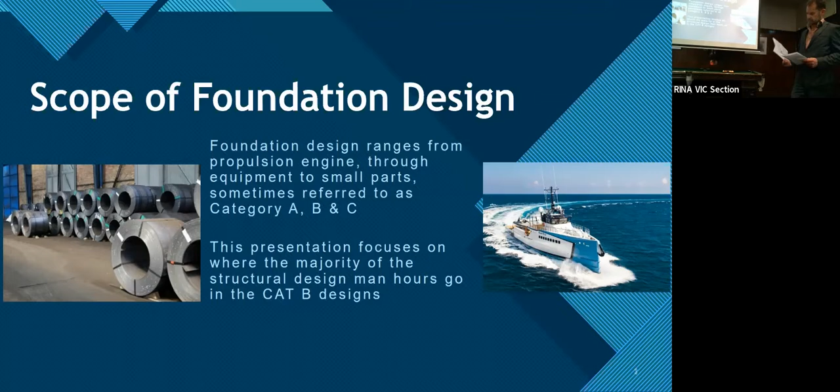Historical or traditional calculation methods is where you take a two-dimensional drawing and the engineer interprets the load path for different load cases which apply to the vessel. These load cases consist of the magnitude and direction of the forces which act on that equipment and structure. The structural calculations then assess the stresses, deflections, and stiffness to test whether they're suitable, and if not, the design is revised. If the design passes, then a refining process can take place. These are traditionally referred to as hand calculations, usually done with a MathCAD or Excel spreadsheet-based platform, or alternatively, a traditional FE process can be used.

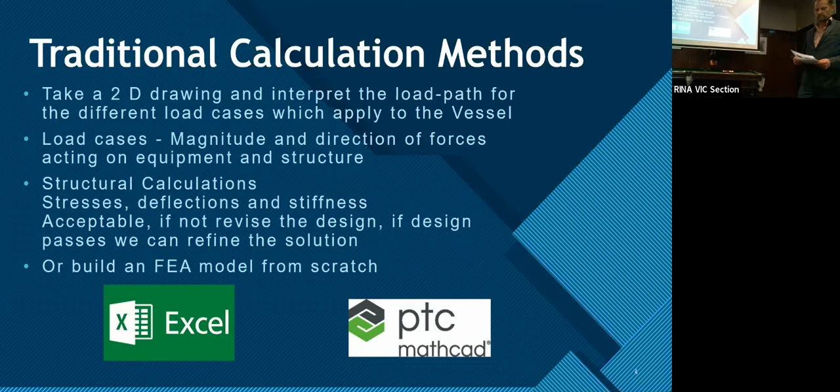So just a quick word on data. We treat all our customers' data in the strictest confidence, and the example you're going to see delivered later today is a dummy generic style example.

When we work up a design workflow, it's always customized to individual organizations, their products, priorities, tools, and people. This presentation is suitable to all sectors of the industry, from naval shipbuilding, oil and gas, commercial shipping, renewables, and mega yachts.

Seat design has formed a significant portion of my particularly early career, and the pictures at the bottom here show some of the projects I've been involved in and give a flavour of how foundation design sits within the design process.

Running left to right, the first is a Type 45 destroyer, where I worked on the FE for the CAT-A seats, including the main engine and gearbox seats, and through a range of typical seats, which would be pumps, transformers, racks, strainers, these sort of items of equipment, and then some interesting things like the breakwater up forward.

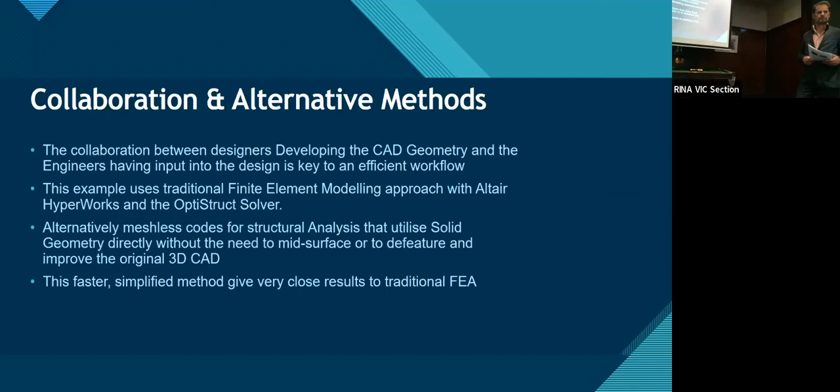Where projects are behind schedule, this directly correlates to saving time and catching up. Where projects are on time, it allows engineers to spend more time on refinement and optimization. Designers focus on doing the most detailed first pass of the CAD with this process, and engineers can investigate optimization of the design in different ways, and look at novel solutions.

The final point to note is, in an ideal world, you do the design, it gets built, and that's the end of the story. But shipbuilding is definitely not an ideal world. Rework varies from, the best I've probably seen would be about 20%, and I've seen well over 100% for long-running new build projects. Using the process we're about to show, reruns for models that have been created are much, much quicker, so your efficiencies compound over the length of the project.

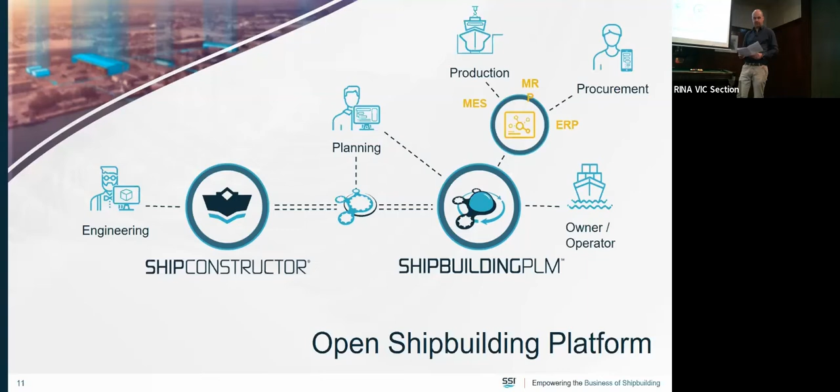Performing FEA throughout the ship design process is certainly not a new workflow. Models are often created specifically for each use case, with the level of detail suitable to perform the analysis. Aside from double handling work, there's a risk of user error.

NSRP, or National Shipbuilding Research Program, is a US government-funded program that works with shipyards and industry partners to overcome some of shipbuilding's unique challenges. One of the programs, LiftShip, was created to leverage existing FEA workflows at shipyards as the basis for automating large-scale lifting, turning, preparation, analysis, and reporting. Some of these include some of the US's largest naval shipbuilders: Huntington Ingalls, Fincantieri Marinette Marine, and VT Halter. The same workflows we'll see today are on a smaller scale foundation.

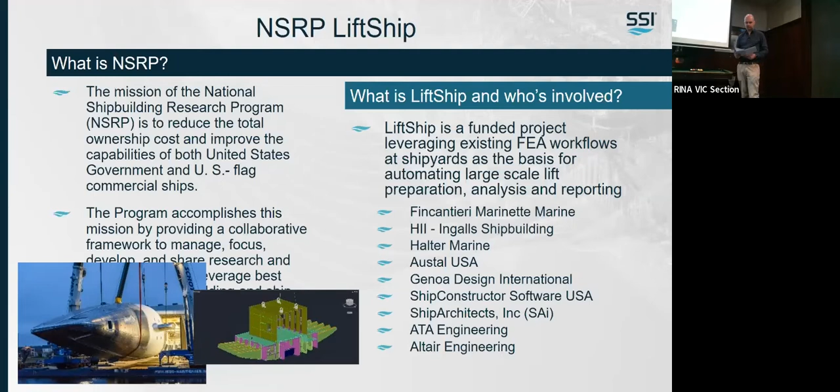So before we get to the good stuff - the validation and optimization shown in orange - I'll touch on the rest of the associated lifecycle. The software shown today includes Ship Constructor, Altair HyperWorks, and Shipbuilding PLM, although the process would be the same regardless of what software tools are being used.

Firstly, we need to find the relevant information. In the example today, calculations are required for all equipment items weighing over 200 kilos. In an ideal situation, within the common product model, a user-defined attribute would exist telling us which equipment items need a calculation and if a calculation has been performed. It's not always the case, but the PLM system or master equipment list can be searched and that information can be found.

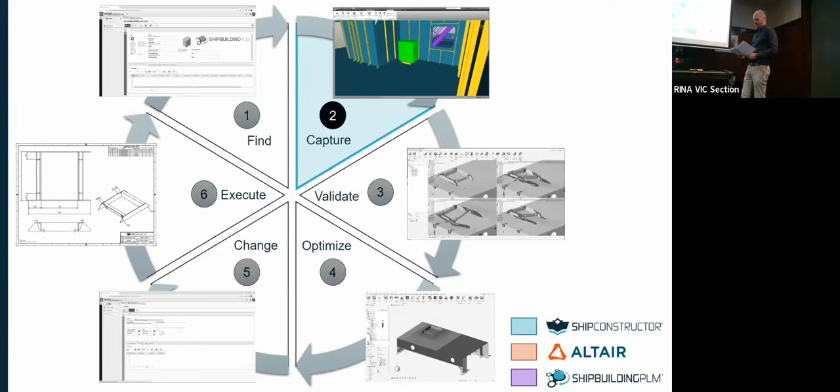Then we need to capture and reuse the information from the common product model. For a transformer, this includes the transformer itself, the nominal foundation that the designers put in, the surrounding structure, and associated metadata such as material, grade, and thickness. Then the foundation is analysed and optimised using specialist software.

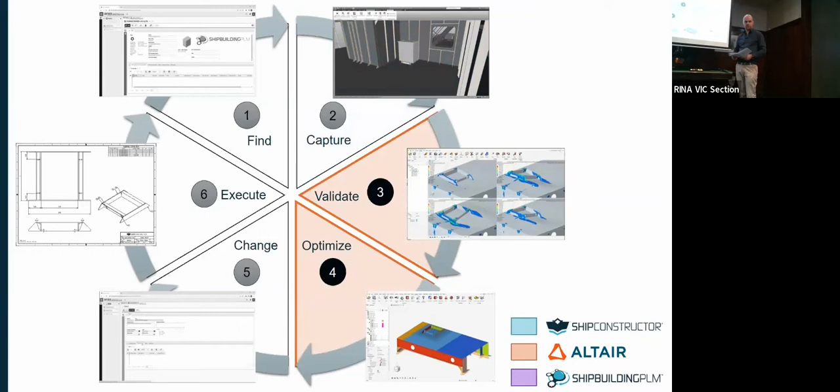Once the assessment's complete, the change needs to be made. Depending on the design maturity and internal processes, this usually results in the creation of an ECO, or engineering change order, where design changes are assigned and tracked. Finally, the changes need to be executed and tracked before being approved, rejected, or changes requested.

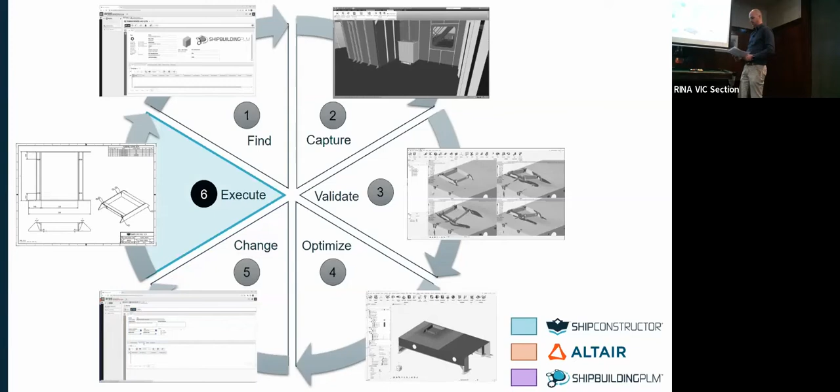Now we'll take a look at the process of finding information. Shown here in shipbuilding PLM, search for the equipment items in the model weighing 200 kilos.

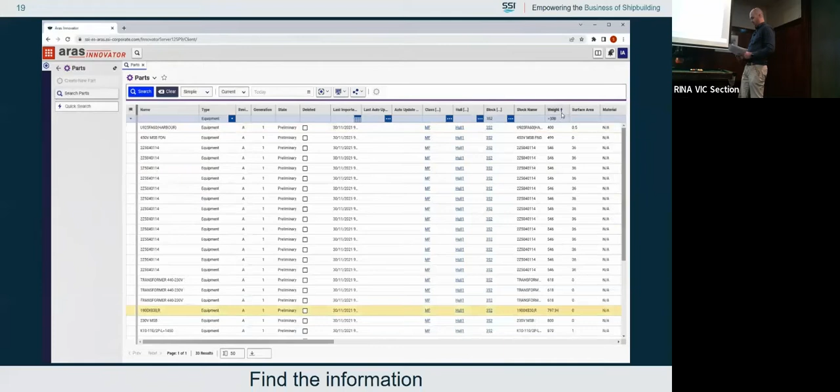Aside from the propulsion system and power generation, transformers are some of the heaviest items on the ship. Against the part, we can see properties such as weight, the compartment, and centre of gravity. We can view the associated parts and drawings, a 3D viewable of the equipment. We can view the requirements that led to fitting the transformer and view VFI documentation from the supplier.

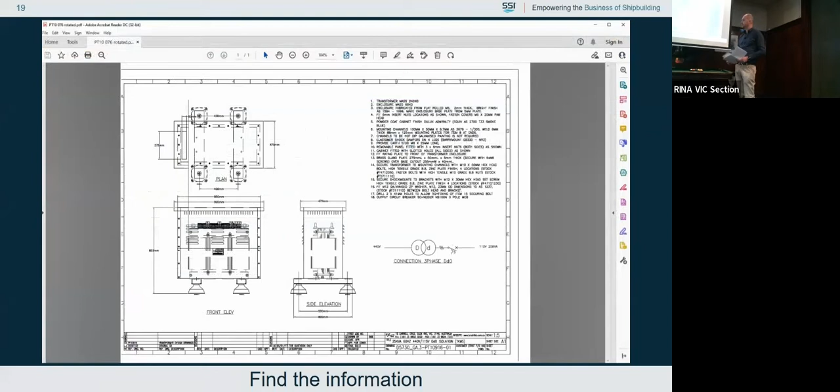Next up, capturing the information and reusing it. The sample vessel shown here is an 80-metre anchor handling tug. The transformer has been placed on a nominal foundation placed by the designer.

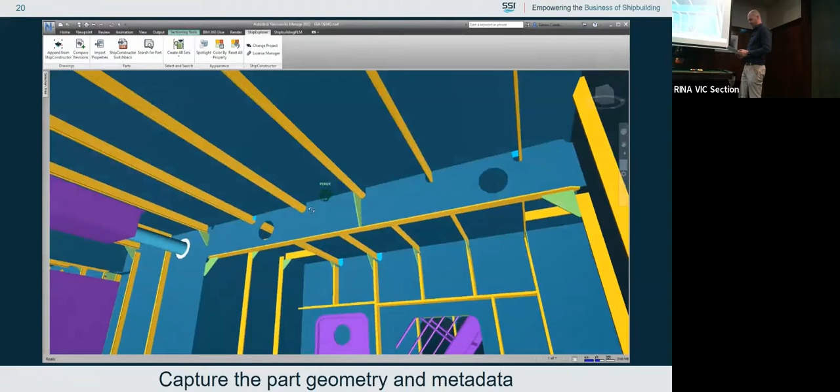This forms the basis of the analysis. The transformer foundation and surrounding structure need to be included. Filtering for the parts, assemblies, or structural sections,

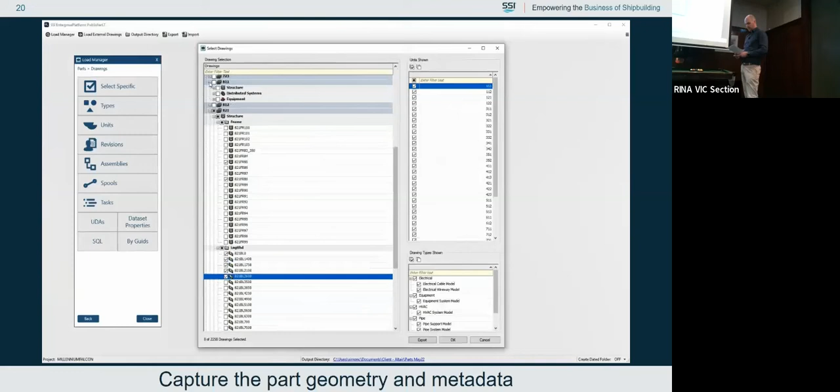we'll find that information and select an operation to create a step file of each part and an XML containing the associated metadata, material, grade, thickness. For this example, it takes less than 5 minutes from a desktop machine to generate the information required to do the analysis.

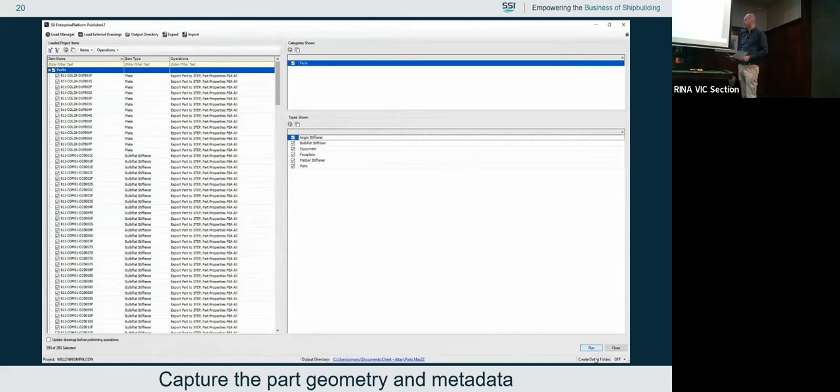From a technical point of view, a step file is created of each individual part and an XML list of all the parts containing the part properties extracted from the common product model. Parts can be selected one by one, or in this case, the easiest way to capture the information is to select the structural sections contained within the area of interest. The XML file contains material, grade, and thickness.

Following the design validation and optimization, back in shipbuilding PLM, an engineering change order is created. This depends on the maturity of the design and if there's a requirement to track the changes made to the model. When creating the change, all affected equipment is identified, and supporting documentation like the report from Altair, PDFs, and model geometry can be attached to this entry.

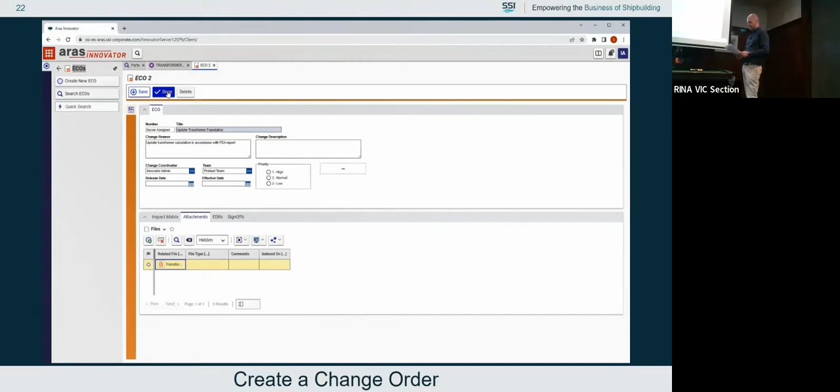Designers complete the work assigned to them under each task. Tasks track the model and drawing changes down to the part level. Finally, the changes will be approved, rejected, or rework requested.

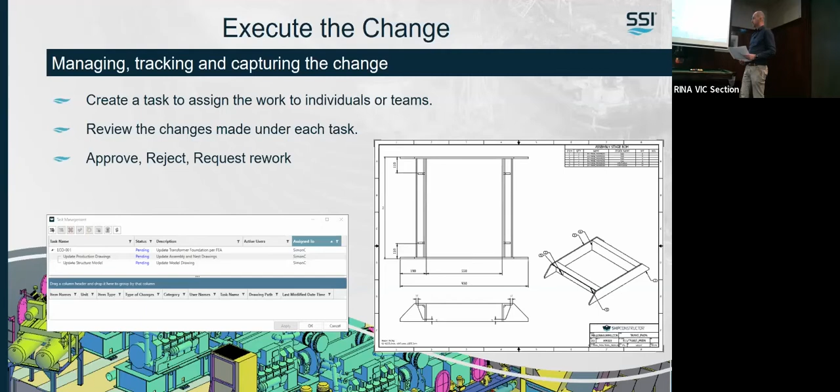Here's a technical look at that workflow we just saw. Engineering change order is created to execute the change. The design report and the relevant model geometry is attached to the ECO for designers to reference. Designers execute the changes, and all changes are managed and tracked under that ECO.

Those 15,000 customers include every single one of the world's major automotive and aerospace OEMs, as well as the majority of major shipbuilders and even shipyards around the world. Both commercial, high-performance yachts and defense. Our customers also include some that you may not expect, like Facebook and Qualcomm, and the financial sector with our artificial intelligence technologies.

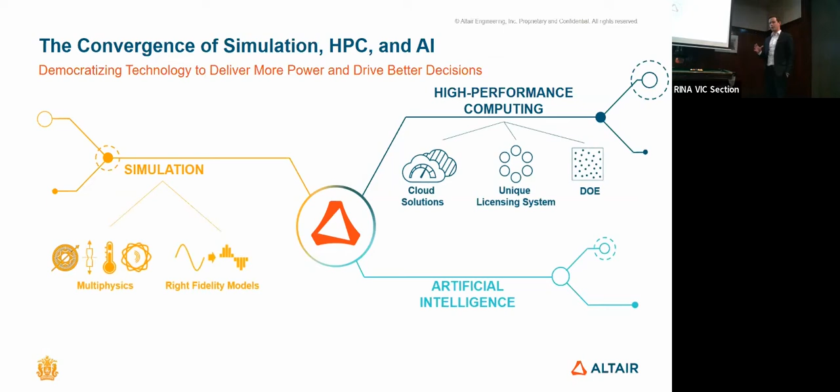Our main focus has traditionally been in simulation technology, where we're increasingly focusing on multi-physics and right fidelity applications, so that you can apply the right technology at the right time to capture the true behavior of your asset without compromising on what you're simulating and how. That's augmented by the availability of high performance computing, both on-premise and in the cloud, which allows you to do much more large-scale design exploration studies with DOEs and optimization and the like.

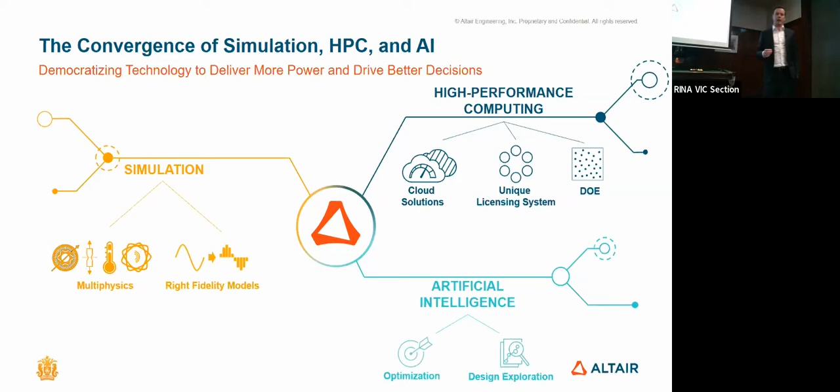And finally, in recent years, we've branched out and acquired an organization focused on artificial intelligence. All these new technologies allow us to provide more information earlier in the design cycle, so organizations can make better decisions with more information. This artificial intelligence augments that technology in design exploration and optimization.

One of the key factors is being able to automate this technology, make it seamlessly connect with third-party tools, so that you can very easily move through the design cycles, and you don't need to be an expert in every single aspect to get the outcomes that you need.

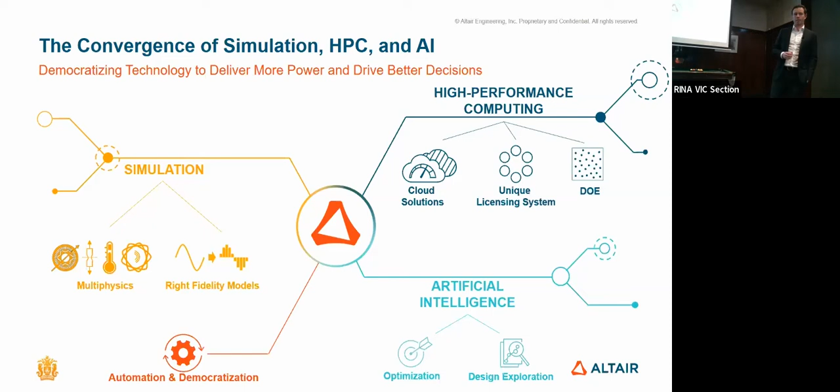Altair has been a leader in marine engineering for many years now, in a number of different areas, including racing in the America's Cup with SailGP and other organizations, looking at design and optimization of composite structures, topology optimization, and even fluid structure interaction problems for the hydrofoils, a real area of technology development.

Also looking at defense, as we mentioned before, Angus and myself have some overlapping experience on carriers and the like. This is an area of real interest for us because there are some really advanced technologies being put into this, such as acceleration shock loading, things that are really important like radiated noise for underwater noise, fatigue, and increasingly even in this space, weight optimization becoming important.

The other area we work with is the shipyards themselves, looking at lifting and turning operations, calculating cable tensions, structural stresses, and process optimization, because a failure in this environment can be very dangerous, but also extremely costly and time-consuming.

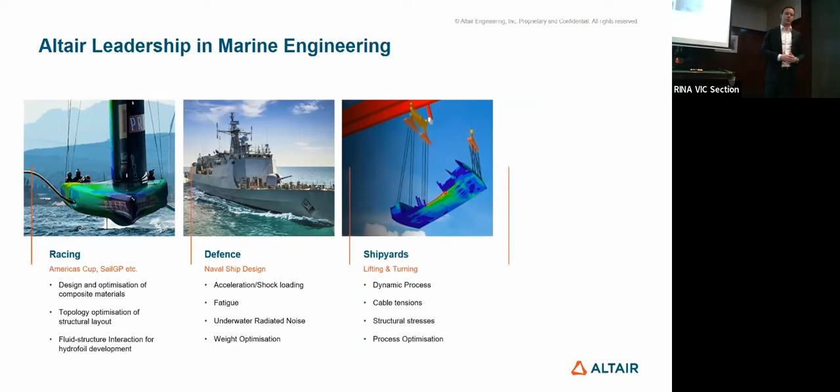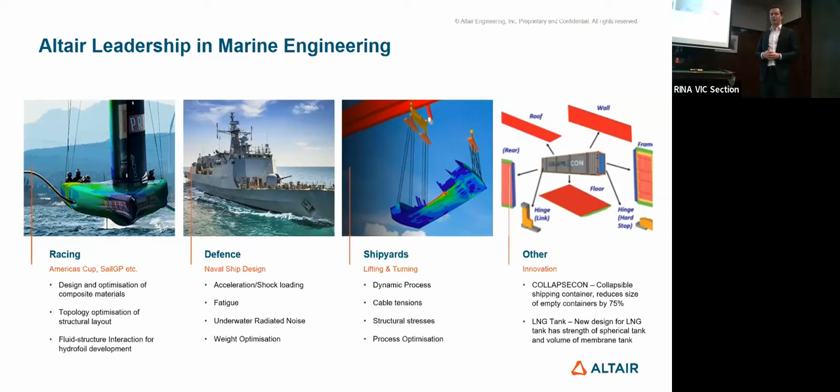There's a ton of auxiliary applications as well. Things you may not expect, like this collapsible container, which allows you to reduce the space taken by a single container by 75% when it's empty. We also developed a new LNG tank, which has been patented. It gives all the strength performance of a spherical tank with the volumetric performance of a membrane tank. So there's a lot of almost random aspects that go into marine engineering that you may not expect from us.

So just to touch on those three main areas of technology in a little more detail, starting with simulation. There's a number of areas of simulation technology available through the Altair platform where we work in marine engineering, starting with stress and noise, which is where we're going to be focusing today. So there's optimization.

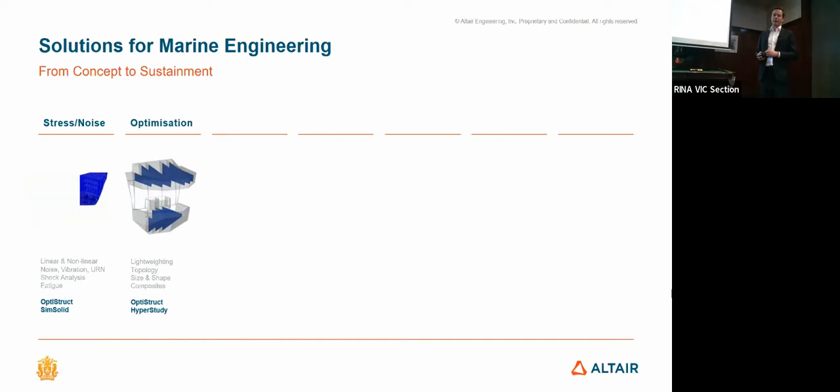In optimization, there's technology, like Angus mentioned, the flight control module. We're able to take the original packaging space, run a topology optimization to identify the load paths, and then perform an engineering interpretation of what that might look like, followed by a further optimization of that stiffening structure. In this case, we were able to save about 15-20% of the weight while improving the performance.

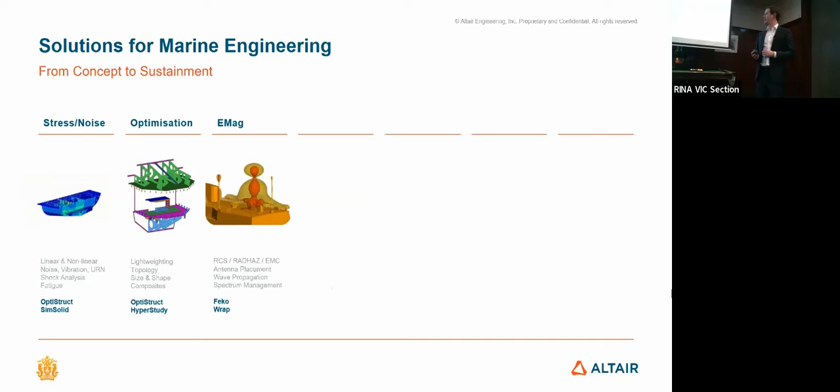The other areas include electromagnetics for radar cross-section, modeling radiation hazard, antenna placement, wave propagation, these sorts of applications when installing antennas on the ship. Also for fluid dynamics and thermal analysis, such as HVAC, hydrodynamics, and a couple of thermofluid structure interaction problems.

In the naval space, underwater explosions is a key criteria in the performance, obviously. So being able to do this quickly and efficiently is extremely important, and our new boundary element method allows you to do it in a fraction of the time of traditional approaches.

And again, more and more the issue of weight is coming up in this area. So being able to predict the performance of different manufacturing methods, such as additive manufacturing and composite materials, is becoming more and more important. And finally, the through-life support for vessels is essential and is actually extremely expensive.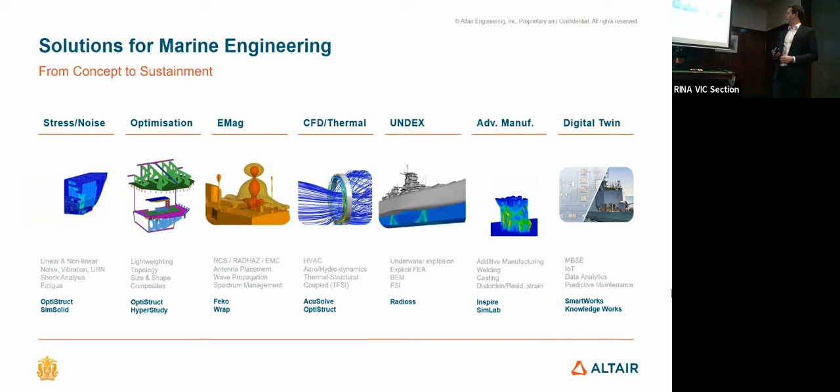So doing this efficiently and accurately by ensuring that you're not wasting time maintaining assets that haven't been loaded, but also making sure, more importantly, that assets don't fail in service is very important as well.

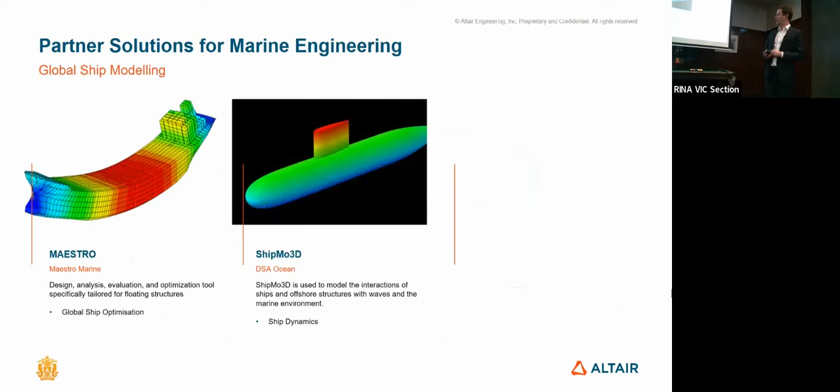So there's the Altair tools, also available under the licensing that we supply a number of third-party tools, including Maestro, which looks at optimization and global ship modeling, ShipMo3D, which looks at ship dynamics, and Proteus DS for systems that bolt onto the ships and apply loads such as towed arrays and these crane assets.

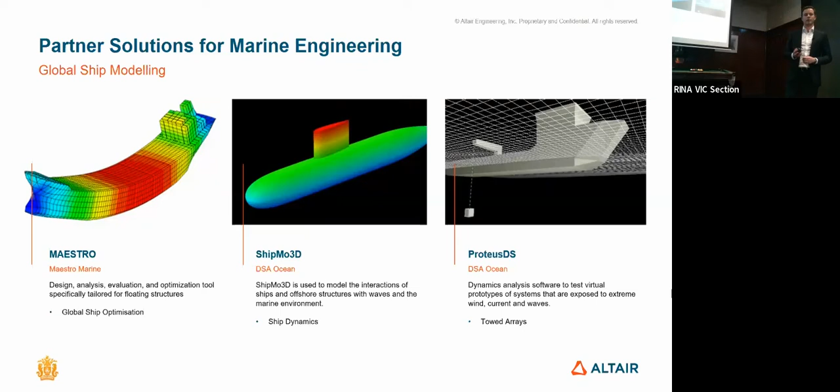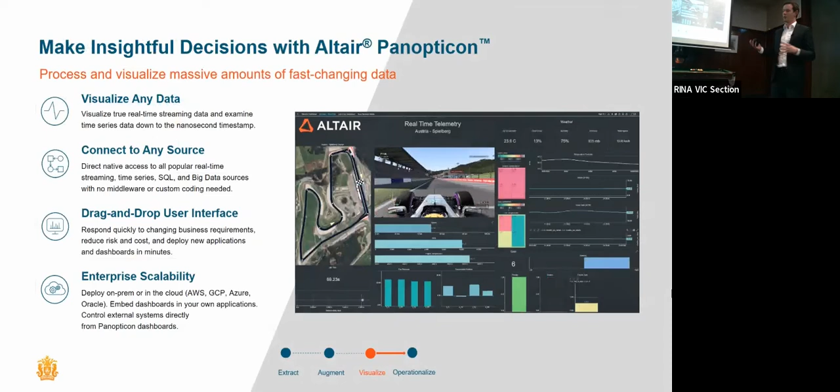So I will just touch on the other areas very quickly, such as data analytics and AI. We're showing an F1 example here, but this ability to monitor behavior and data in real time can be really useful, as well as being able to look back. So this is really useful for asset monitoring and management.

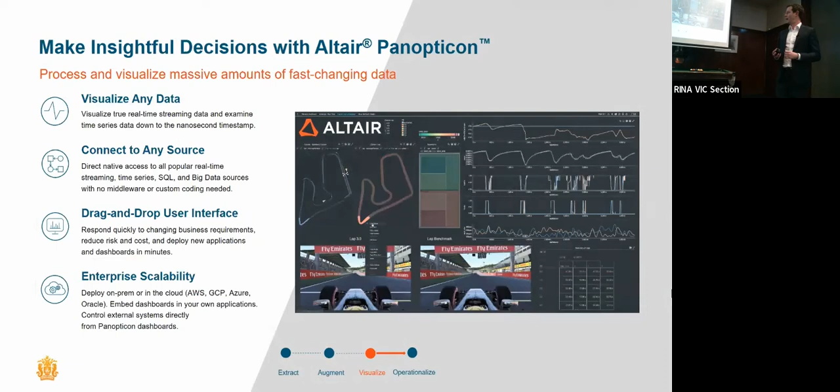And then in the high performance computing region, this really augments the technology and allows you to run much more than you would otherwise. So we have PBS Pro workflows, which primarily allow job scheduling so that you can run multiple jobs on a given system and be confident that they're going to complete in time.

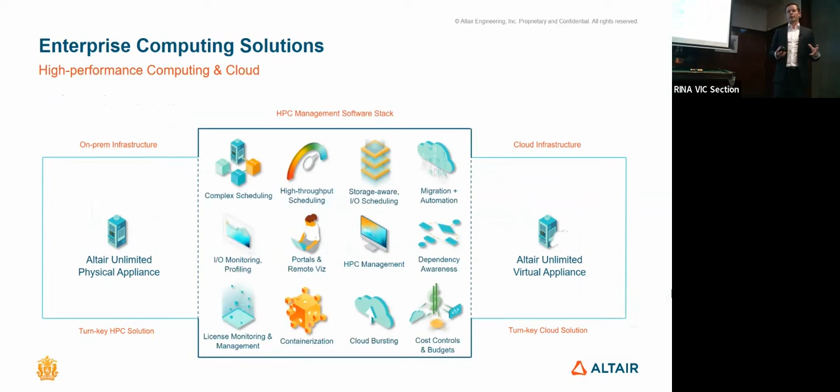But then a lot of organizations don't have high performance compute systems. So we actually supply physical appliances, a turnkey solution to design custom high performance compute systems, which we install on site. Or alternatively, if it's an ad hoc requirement, the cloud is a very good option. So all of our applications are available as a turnkey solution on the cloud as well.

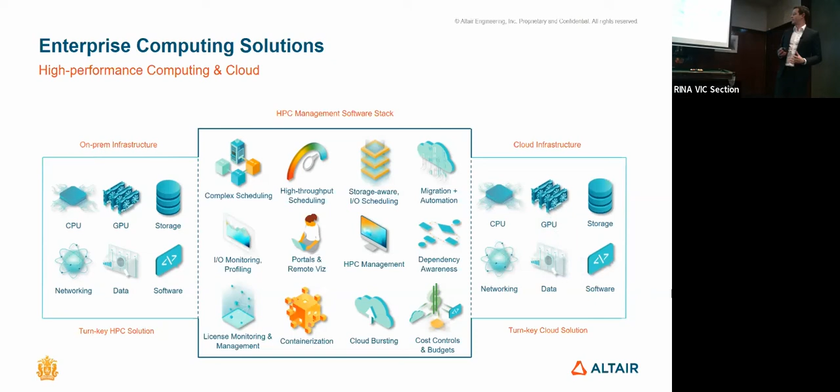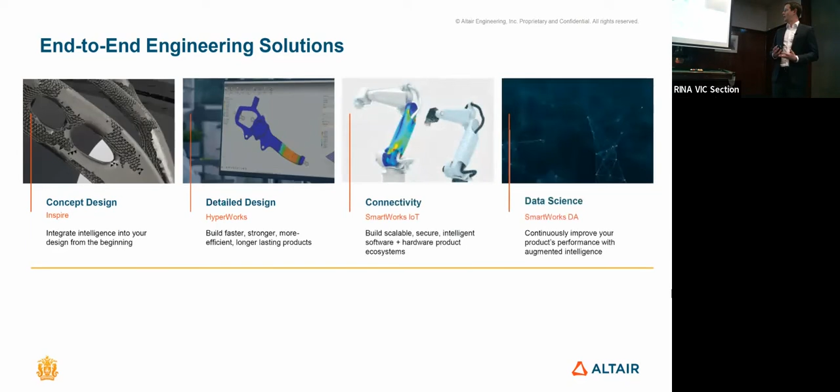So just to conclude my section, there really is an end-to-end solution from concept design, detailed design, connectivity and data science, underpinned by model-based systems engineering technologies, high-performance computing, and the cloud.

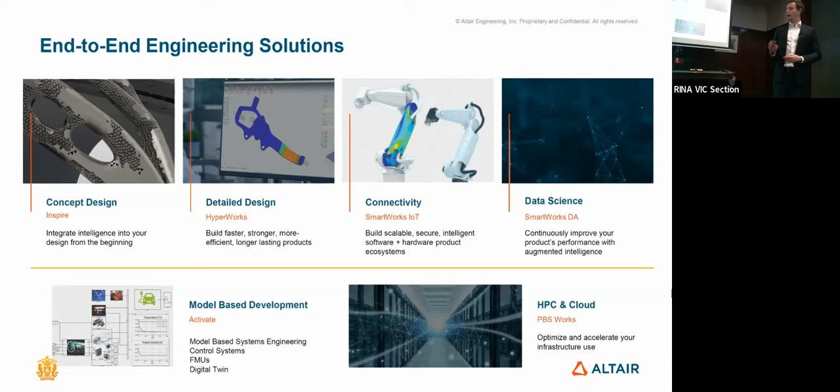So I will now pass over to Tim to work through the example on today's model.

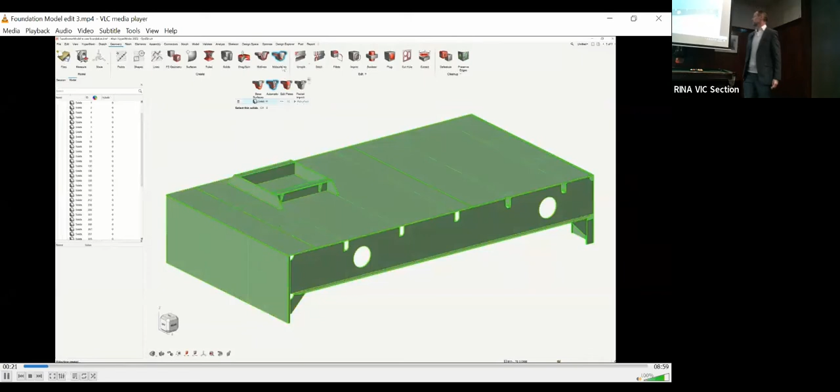So we're taking the solid geometry from Ship Constructor, from the CAD and PLM system, and trying to capture not just the geometric data, but the non-geometric data as well, that has the properties, the materials, the gauges, and so on into the model.

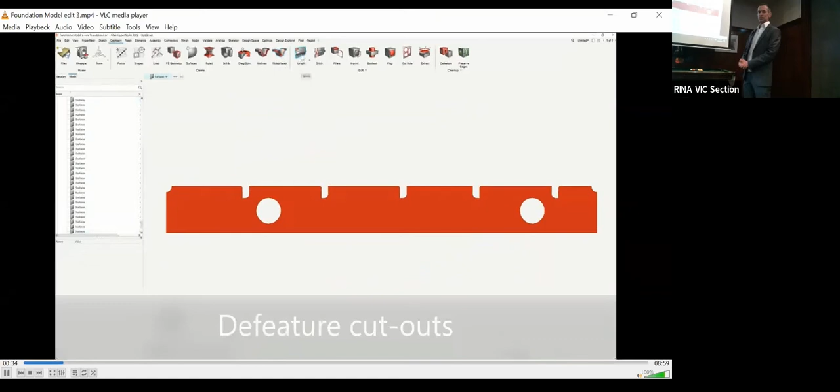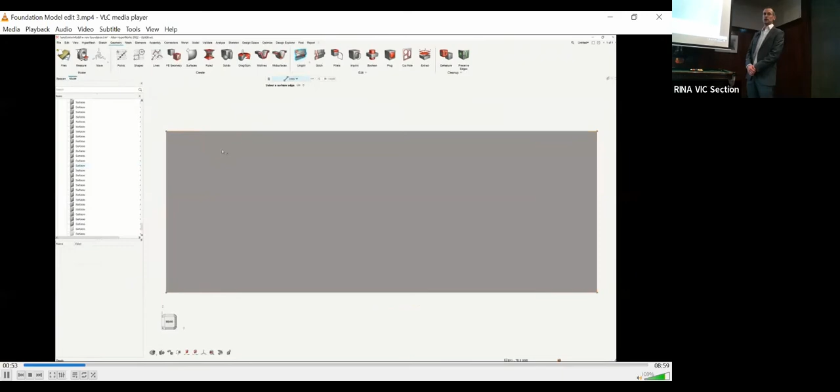Then we're creating a mid-surface representation of that. We're removing some of the features which are not necessary. So we're focusing on the detail of the foundation on this part, and the surrounding structure we can represent as a more simplified part. So we remove the features we don't need, maintain the ones we need to keep, and get an accurate solution.

So here we're just removing some of the cutouts on this model. And then we're going to focus on the design of the foundation here, which supports the transformer on the vessel. So you can see the mid-surface has been created, but the surface is not yet stitched together.

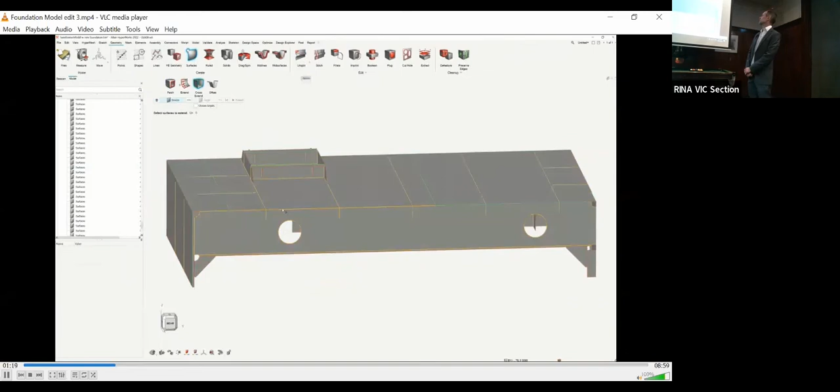So we just need to reconnect those mid-plane representations of the geometry, so we can produce a shell mesh of the model. This gives us a much more efficient FE model of the structure by using a shell mesh rather than a fully solid model of the structure.

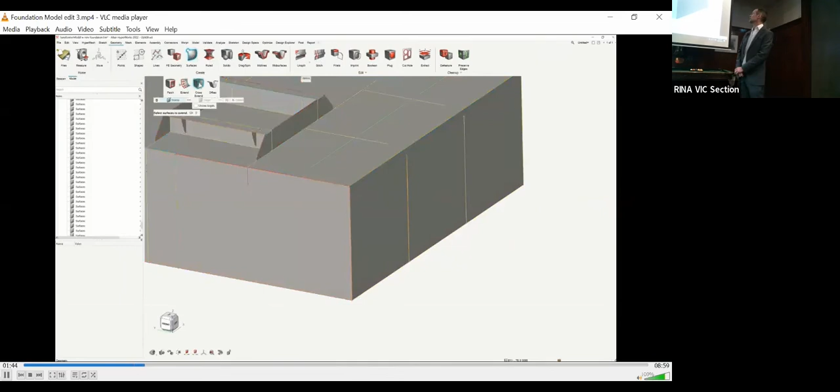So we can modify the geometry. Ideally, the CAD and the designers have given you the model and the details you need, but you can also modify it in HyperWorks, as seen here, if you need to. So if you need to add features that are missing, or change the design and see how that affects the results when you validate or optimize the parts.

So here I'm just showing you can quickly copy and paste some of the ribs from the features of the model, move those to a new position, and stitch them back in. So if you need to add features and modify the design, you can do that fairly easily in the new version of the software with the modern interface we have now.

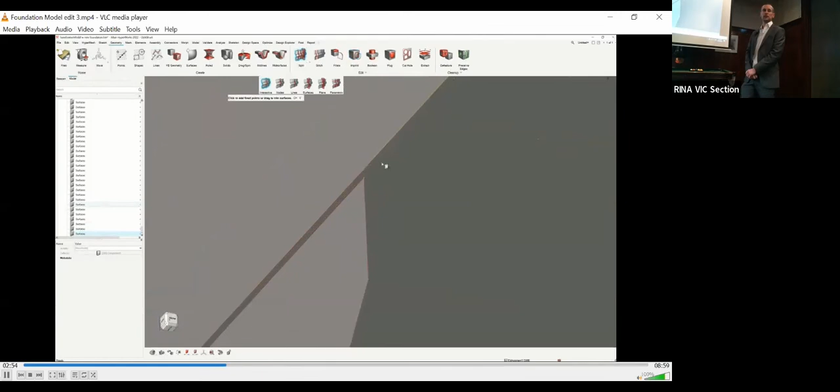So the roof's been copied and offset, and then it just needs to be stitched back into the main structure here. So we're just imprinting the new surfaces we've duplicated to support the structure, imprinting and connecting into the rest of the surfaces. If the design has all been completed in the CAD, you obviously don't need to do this step, but these are extra steps you can do if you need to go further and make modifications for the simulations.

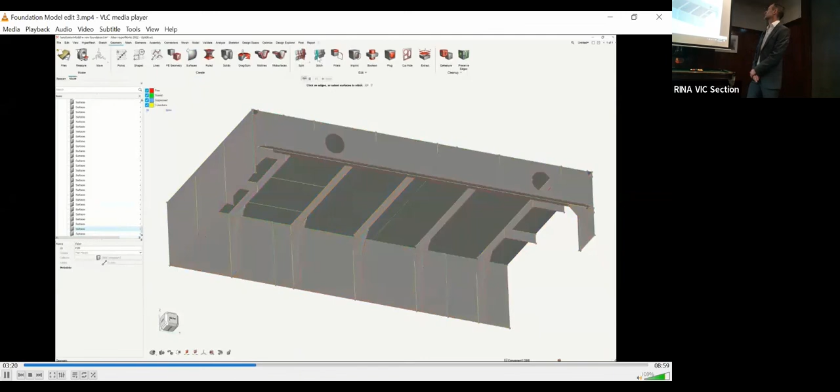So the color coding on the screen, you may not be able to see it clearly, but the color coding shows different color lines as to whether things are connected properly, so you can quickly and easily see if your model's of good quality and if you need to repair or fix anything. So top left is the key there with the red, green lines and so on.

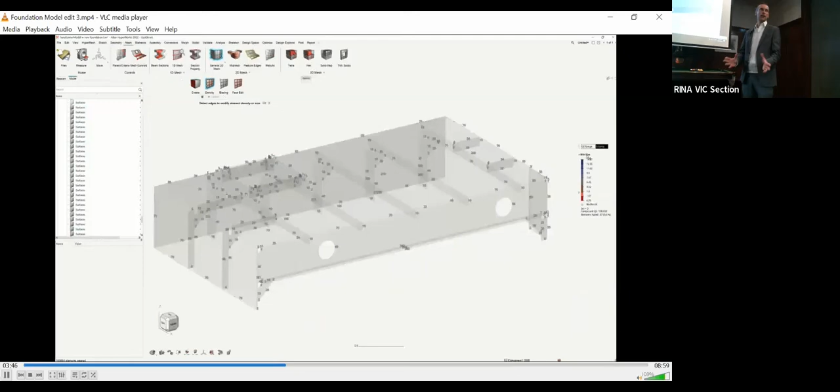Once you're happy with the geometry representation of the mid surfaces and they're all connected, you can just perform the meshing on the parts. There's a number of different methods to do the meshing. You can do a one-step mesh with a constant element size, or you can have a refined mesh in the areas of interest, and then a mesh around the outside to reduce your model size.

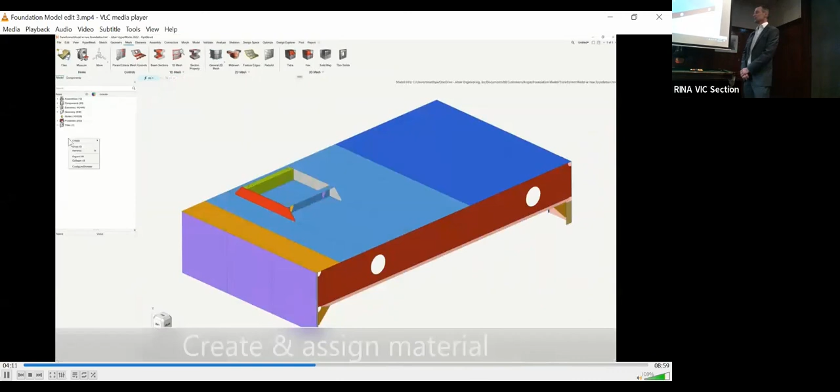This example is obviously not the biggest model, but some models are much larger, and you need to focus more on making sure the model is not too large. So you can see the thickness is now visualized on the shell mesh here. The thickness data has come from Ship Constructor or your CAD system, so the idea is to import as much of the data from your CAD and PLM system as possible and make sure that's automatically assigned, to reduce errors and speed up the process.

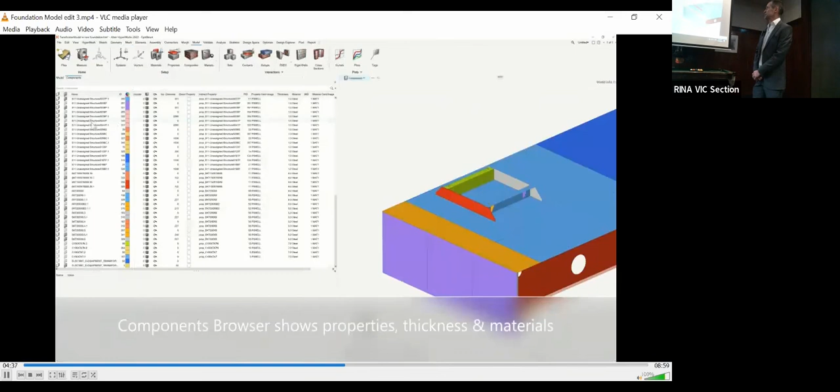Then the properties and materials. The properties get brought in automatically and you just need to check the materials are assigned and everything's looking correct for the model. So just do your final quality checks on the model, reviewing in the browsers all of the geometric and non-geometric information, such as thicknesses, materials, etc.

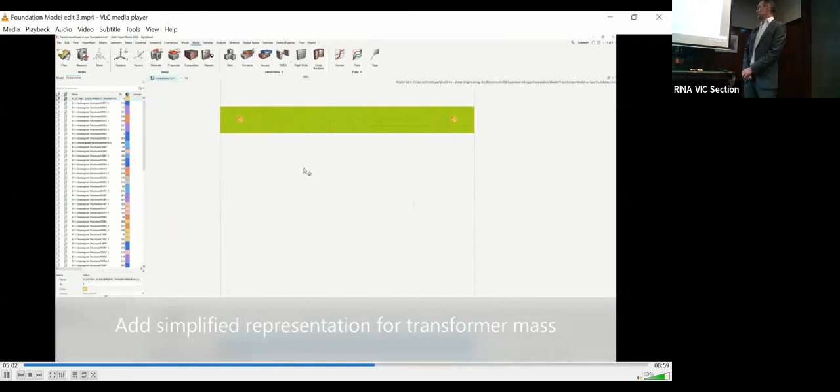Now just zooming in on the foundation design. It's a generic foundation. The process we push with Altair is to not spend too much time up front with a design. If you work with a generic and more heavy design, you can let the optimization tools tell you the most efficient layout for the material and the gauges.

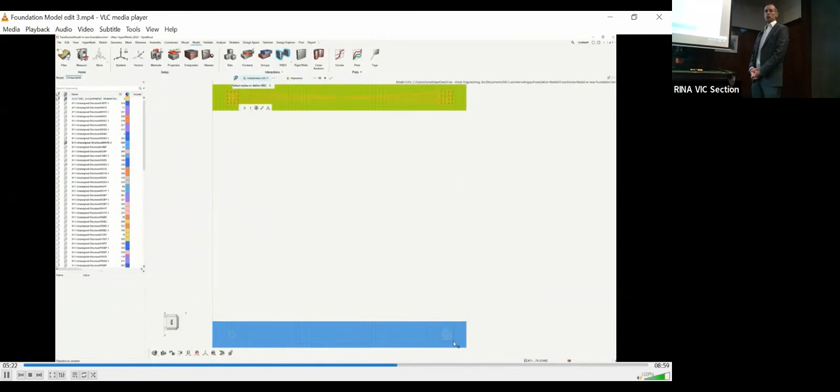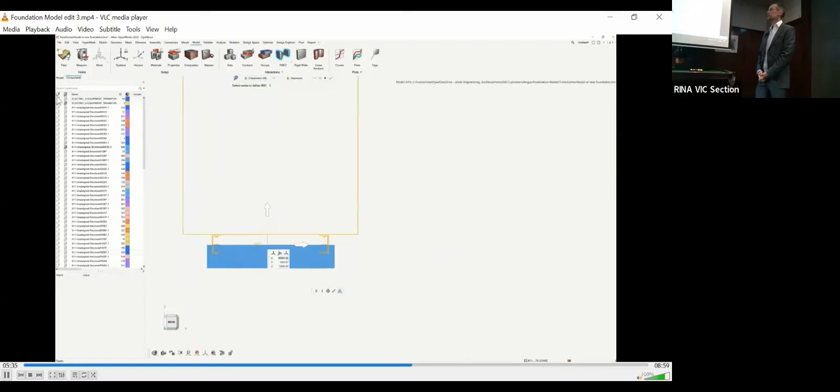Here we're just putting in some connections for a simplified representation of the transformer in this case. You can add more detail if needed for modeling the bolts and things, but just to show an example, here we're having a concentrated mass to represent the transformer mass and center of gravity. Then we're going to create and apply some boundary conditions, gravity loading, acceleration in different directions, and also do a modal analysis for the structure.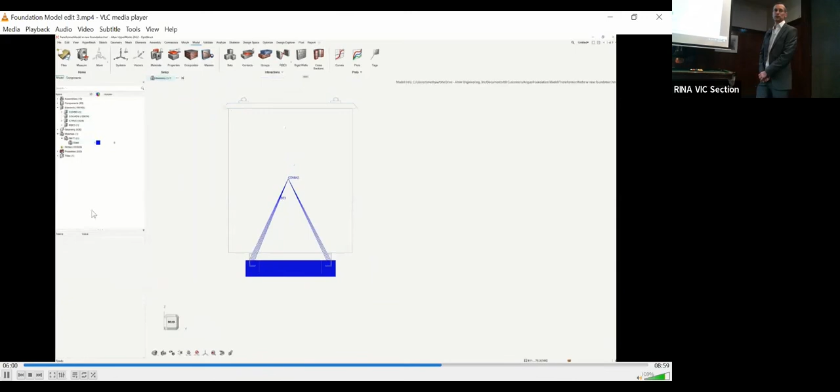So there you can just see the transformer in wireframe and just a concentrated mass added to represent the center of gravity, mass and inertia for what's mounted on the foundation.

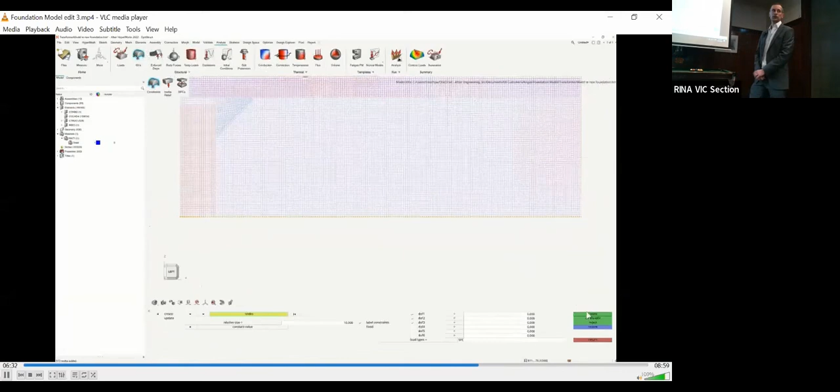So we need to add the boundary conditions. This is just a segment of the structure of the ship. In real life, this will be attached to the rest of the vessel. So at all the boundary areas where it will be connected into the main ship, we need to apply the boundary conditions in the relevant directions and support the structure in the XYZ or rotations as necessary to support this design for the simulation.

Then we create a few loads here, so gravity loads, so we can assign gravity and put in some 2G, 3G loads or whatever is specified for the vessel, looking in the XYZ directions, and then create the load steps that link up which boundary conditions we're applying at the same time as which loads.

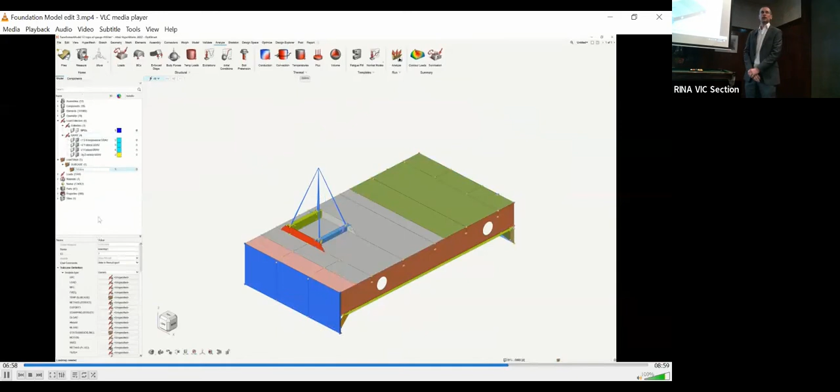So a lot of it's just done from the model browser on the side. You can right click and create most of your entities in there and link up the load cases and the settings you need to analyze the structure.

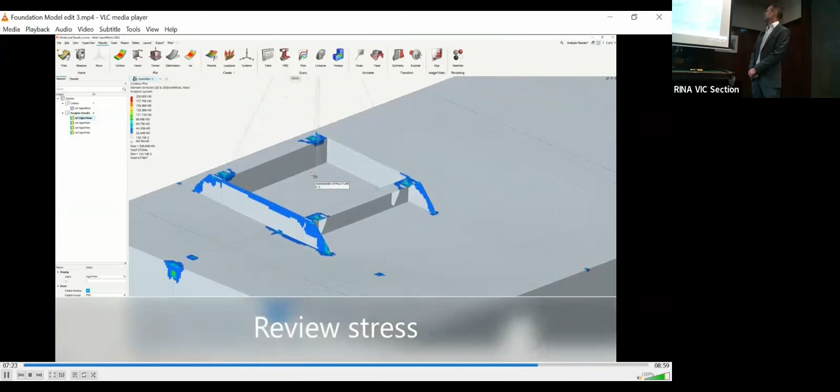And then you run it in your solver. In this case, we're using OptiStruct. We're reviewing the stress of the structure. In this case, looking at, I think this one's the vertical G loading, 3G loading, and then the other windows here, you can see we're looking at the gravity loading in different directions and different magnitudes.

So you can create reports from HyperWorks as well. You can have multiple windows and pages, and then export these to PowerPoint or Word, and get a what you see is what you get type of report.

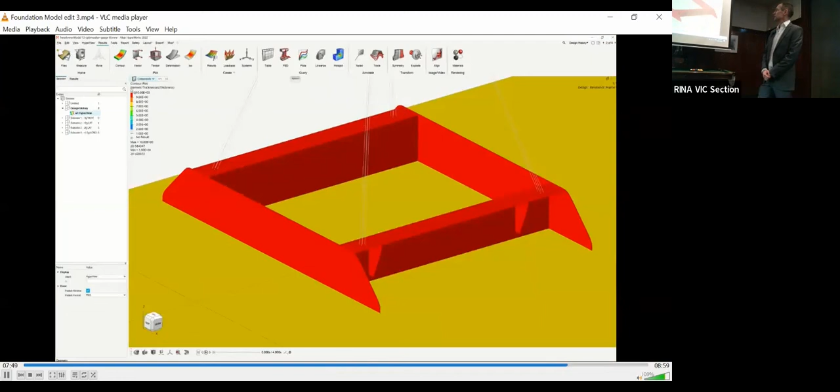And then we can go on to the optimization. Once we've looked at the validation of the stress, we can optimize the gauge here. You can see the colors changing as it's optimizing to reduce the gauge to meet your stress, stiffness, and structural targets. So you're maintaining those targets, but making it as light as possible.

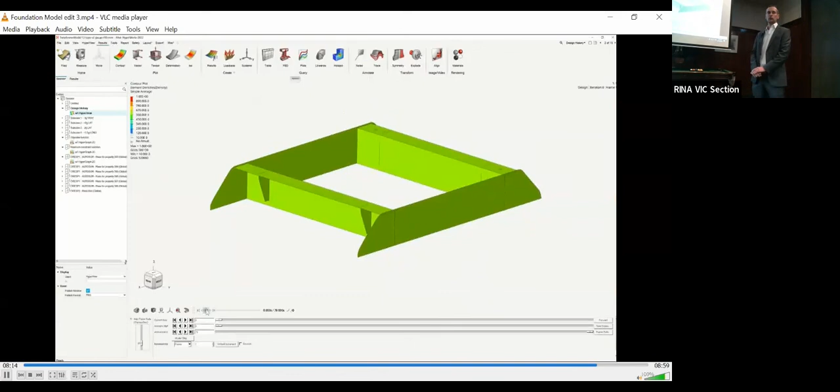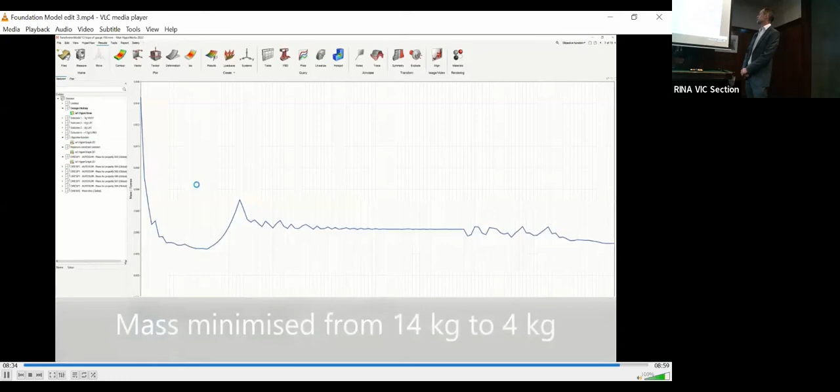And then you can go on to doing topology optimization, which is actually where we're looking at removing some material from the structure here and looking at the most efficient load paths in the structure, again, to meet our criteria. So the initial design is sort of too heavy on purpose. We can reduce the gauges, look at the best load paths with topology, revise the design based on these directions, and reduce the weight of the parts.

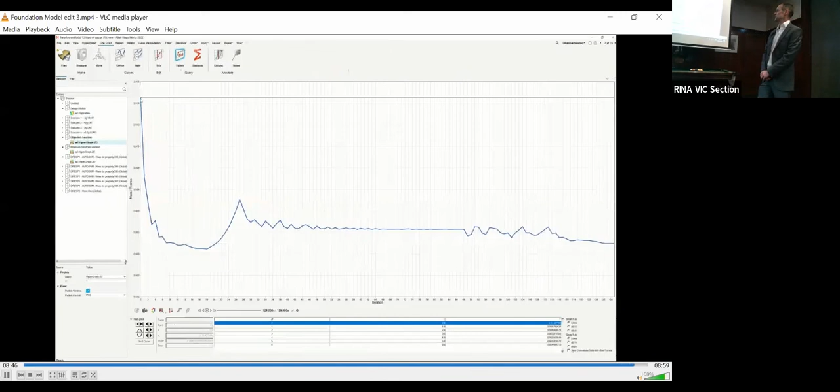So here you can see for the gauge, the topology analysis, it's gone from about 14 to about 4 kilograms in that example. Obviously, the first design is not one that's been optimized fully, but it illustrates how you can quite easily take out a fair bit of weight from the designs. Even if the design was tailored a bit more carefully, there's still scope for good improvements of weight of 20 to 30% or more potentially.

So that's a very quick overview of the process of how it looks interactively in HyperWorks, taking the data from ShipConstructor and going through the simulation process to validate and optimize the foundations in the vessels.